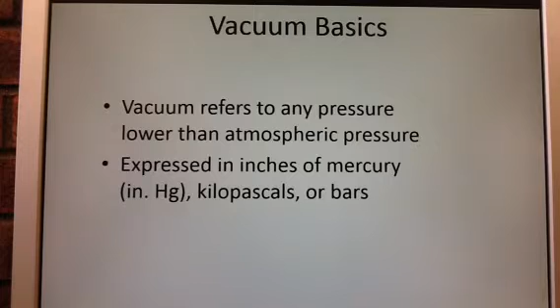We're seeing it more and more in kilopascals. And why are we seeing it more in kilopascals, guys? That's one thing to keep in mind - we're going to see that more and more versus just seeing inches of mercury.

Diagnosing and troubleshooting some of this with our vacuum. Vacuum problems can produce or contribute to the following symptoms: stalling problems, poor starting, rough idle, poor acceleration, detonation or knock, and possibly poor fuel economy.

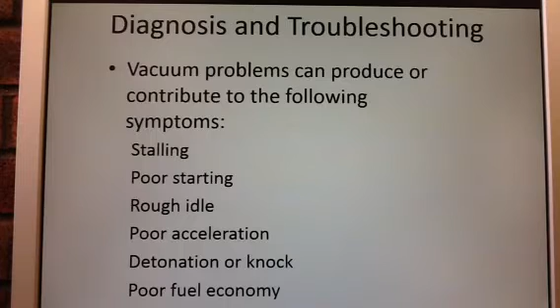Now looking at these, a lot of these could simply be attributed to maybe having a vacuum line disconnected, or a vacuum line that is cracked, kinked, or bent. We need to be able to look that over, and this is where our visual inspection comes in - seeing what's going on with this vehicle by just popping the hood and looking at it. We don't have to get too far into a diagnostic sometimes if we just visually inspect and see what's going on with that vehicle.

We need to inspect for improper routing. Maybe another technician or the customer tried to fix some problems and improperly routed some of the vacuum lines, so something might not be connected to the correct place at the correct time. You could have something like an EGR solenoid that only has vacuum at certain times - that can't be connected up to our MAP sensor, so it can't be getting vacuum at the wrong times.

Simply disconnections, cuts, or kinks - looking at something that's fallen apart. We've talked about it with our GM models, such as the vacuum line that connects directly onto the throttle body. Look at that, make sure it's connected up properly, and make sure it's not cracked or cut by any means.

And then wear near hot spots. We've also talked about this on some of our late model Ford vehicles, where we see that vacuum line on the back side of the intake manifold, or very far back there, where it's going to have a lot of heat. In that case, we need to look at those plastic vacuum lines and make sure they're not melted, and make sure there's no vacuum leaking past that.

One thing we talked about was making sure we use that smoke machine so we can see if we find any leaks - a very simple diagnostic. If we think there's any possibility of having a leak anywhere, we could use our smoke machine to try to find any of those leaks.

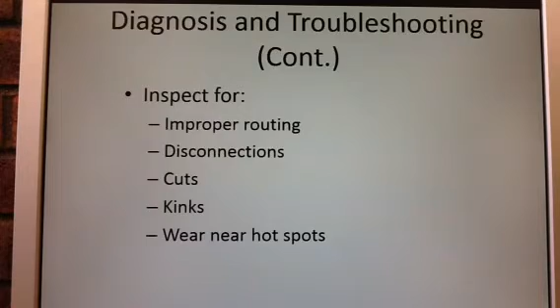Talked about turbochargers this week. A turbocharger is an exhaust-driven air pump. Exhaust gases spin that turbine blade. That turbine itself is on the hot side, the exhaust gas side. You see up here where the exhaust gas is being expelled out of the engine, it comes down into our turbine housing here and turns our turbine shaft. So we're seeing a turbine wheel, and it comes out and blows the exhaust gas back down to where it's expelled out the rest of the exhaust.

Now adversely we have our cold side over here, that's our compressor side - the compressor wheel and compressor housing, where it's directly forcing air back into the intake manifold now. So we're actually forcing air back into the intake. We have our turbine shaft connecting the two wheels together, so we spin this turbine wheel, which adversely spins the compressor wheel, therefore creating our boost pressure to blow back into that intake manifold.

So we are having that extra increase of air so we can add more fuel and have more power coming out of this engine.

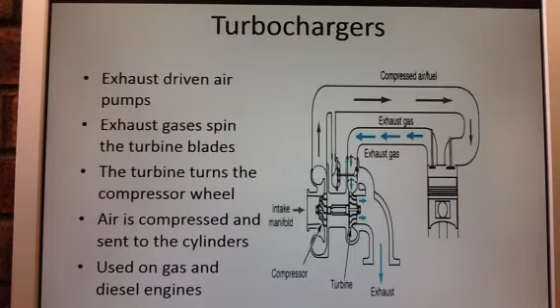The turbine, as I said, turns the compressor wheel. The air is compressed and sent to the cylinders from this. We use these on gas and diesel engines. As we talked about last week, we see this quite commonly on our diesel engines, very common to see. We are starting to see it more and more on our gasoline engines too.

Turbo lag is the lack of immediate response. It's caused by the exhaust gas requiring time to build enough energy to spin the turbo fast enough to respond to the engine speed. It's something we don't see with our superchargers, because they're driven by the belt, so they have power immediately at all times.

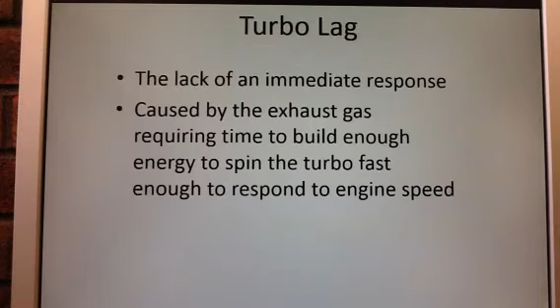However, with our turbo, we have little exhaust gas being expelled at idle or low RPM. As the RPMs increase, the turbocharger boost pressure is able to rise as the RPM of the turbocharger increases.

Our wastegate valve exists because excess boost pressure can cause drivability concerns and engine damage. We can't have too much boost pressure, so we have to be able to regulate it back down. The wastegate allows a certain amount of exhaust gas to bypass the turbine wheel once it reaches a certain level.

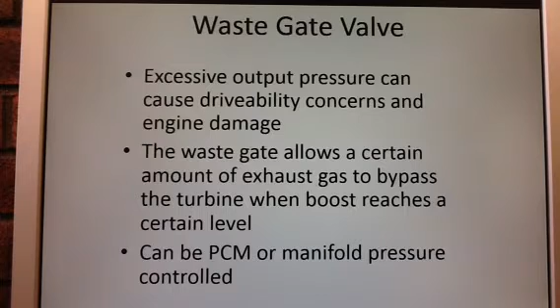That wastegate can be controlled by the PCM or by manifold pressure. It has been controlled by manifold pressure for quite some time, but we're seeing it more and more PCM controlled, so we don't have problems like a cut or kinked vacuum line, and we can regulate things better. If a vehicle needed to go into limp mode, it can simply open the wastegate up completely, and no boost pressure can be created, versus a mechanical vacuum-controlled system where we can't fully stop the turbocharger from building boost pressure. So we're seeing a lot more PCM controlled systems.

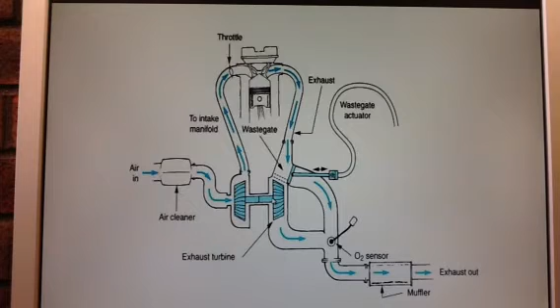As more exhaust gas comes out, the further the wastegate opens. As more pressure builds, it opens more and more, regulating the boost pressure going past this. This regulates the boost pressure so we don't have any internal damage to the engine or other problems.

Superchargers. A supercharger is a positive displacement air pump driven by the crankshaft. They improve horsepower and torque by increasing the air pressure and density to the intake, a lot like our turbocharger. Theoretically, we're once again just forcing air into the engine.

The difference is that instead of being exhaust driven, our supercharger, like this type set on top of the intake manifold, is not driven by the exhaust. We have a pulley right here, and there will be a belt on this pulley that is driven by the crankshaft.

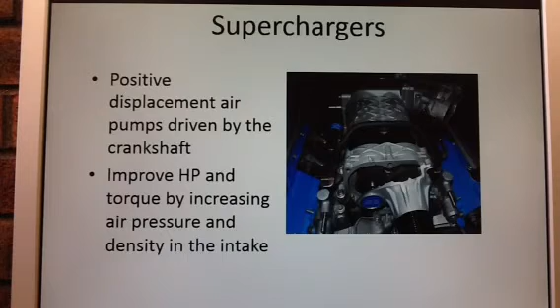It's actually driven the same as your serpentine belt that drives the alternator or maybe the water pump. That belt is going to drive the supercharger, and it's going to turn the rotors inside, creating a force that pushes air down into the intake manifold.

In supercharger operation, air enters from a remote mounted air cleaner and airflow meter. Once it passes the throttle plates, air passes through an inlet plenum.

The air is pressurized by the spinning rotors, as I talked about. This heated air then passes, generally speaking, through some sort of intercooler, so we can have that air be as dense as we can possibly get it inside the engine. We want that air dense so we don't have high heat and lose power.

If we have very high heat in the air, we're not going to get the power we need out of it. We're going to have knock, detonation, or ping. We don't want to see that type of problem.

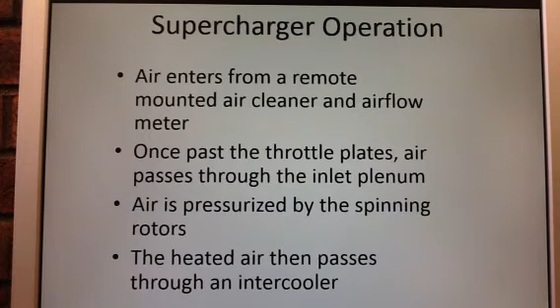So a lot of times we'll see some sort of intercooler with that. It's not as common on supercharger vehicles to see intercoolers as it is on turbocharged vehicles, but it is out there, and we're going to see more and more of them as the supercharger evolves.

There are two different types of supercharged systems we talked about: the roots type and the centrifugal type. The picture I just showed you is a roots type. It uses a pair of three-lobed rotor vanes, and the belt is driving these via the crankshaft.

So we have the rotors inside that are spinning, kind of like a vacuum, but instead of having the vacuum source sucking in, we're actually pushing out. We're sucking in from the intake side and pushing down, forcing the air into the engine.

Adversely, we have a centrifugal design. The centrifugal design looks very similar to our turbocharger, but it is belt driven rather than exhaust driven. A turbocharger is driven off of the exhaust, but our centrifugal supercharger, even though it looks a lot like a turbocharger, is driven by the belt.

We see the compressor wheel like we would see on a turbocharger, but instead of having a turbine wheel, we have a pulley. That pulley is driven by the belt off the crankshaft, and it spins the compressor wheel to build boost pressure.

So these will look very similar to a turbocharger, except now it's mounted maybe in the location where you would see an alternator or an AC compressor, where the belt is able to drive it.

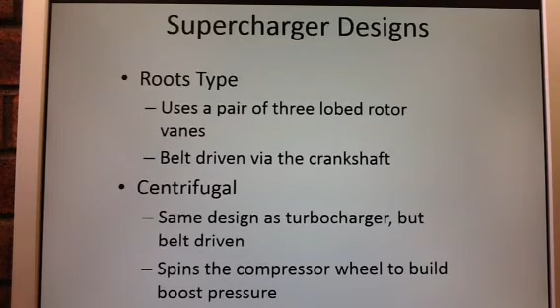So either way, with each of these designs, we're talking about a belt-driven design here, as opposed to our exhaust-driven design, which is where we're talking about our turbocharged designs.

As for maintenance for any of these pieces, normally superchargers have their own oil supply. Check and correct the oil level periodically. It's one thing a lot of people will sometimes miss.

You may do an oil change, but the oil change just isn't an oil change. We need to be looking at the entire vehicle, as we've talked about, maybe looking under the car.

Look at the tie rods, look at the steering rack, look at everything under that car. Look for oil leaks. We're not just changing oil, and it goes with this too.

If it has a supercharger, we need to look at its own oil supply. There are regular intervals that it needs to be changed. Has it been changed? We can ask the customer, or go back on our own data in our system to see if that oil has been changed.

It's something to check, just like checking our differential fluid. We check something like that if we're checking any fluid in the vehicle, period. We need to be able to check this one also, so don't forget that one.

Inspect regularly for leaks. If we notice a leak with it, we need to find out why it's leaking, where it's leaking, and fix that problem. And inspect for induction systems for leaks and filter condition.

Leaks in a turbocharged or supercharged system are going to be a lot more prone than our naturally aspirated systems. The reason behind that is we're actually forcing air now, so there might be vacuum lines that pop off. We need to be able to look on each one of those and find is there anything leaking with that.

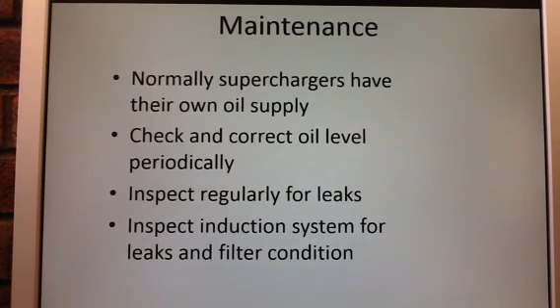So we back all the way up into looking at those cuts, kinks, bends, stuff like that. We might have a turbocharger that's building too much pressure, or a supercharger that isn't working properly. Maybe the actuator for the bypass actuator that we talked about previously this week isn't working correctly. We can look at that, and the vacuum leaks for that also. Those supercharged and turbocharged vehicles are going to be a lot more prone to having those vacuum lines come off.

Talking about our exhaust systems this week, we went all the way down from start to beginning, whether it be our exhaust manifolds, the exhaust itself, the catalytic converter, maybe the tailpipe, maybe the muffler. We talked about each one of those different pieces. We'll break that down just a little bit here.

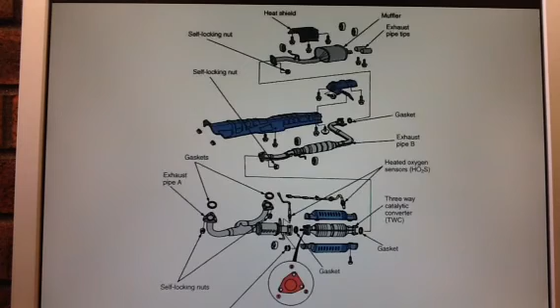The exhaust manifold collects and directs the gases, and can be cast iron or stamped steel. We usually see it in those two things. Cast iron quite commonly because it's very easy and not expensive to make, where the stamped steel gets a little more expensive because we have to have more pieces to actually build that together. We're going to see that stamped steel, or maybe stainless steel, in more exotic or newer vehicle applications.

We do not see anything aluminum at all on our exhaust manifold itself. The reason we're not seeing that this time is it's just too much heat for that to be able to put out to it. We may see an intake manifold that is aluminum, but we do not see our exhaust manifolds as aluminum.

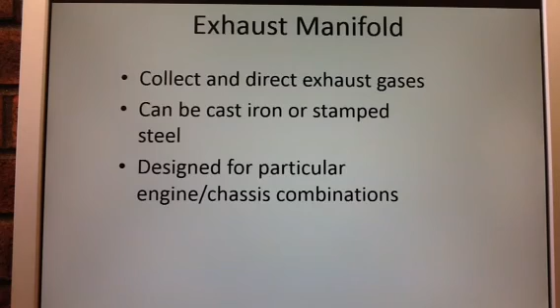They're designed for particular engine or chassis combinations. So we have an exhaust manifold that's not just made for the engine, but also the chassis combination also. We may see a Ford Crown Victoria engine that has a completely different exhaust manifold than a Ford F-150. It may be the same 5.4 or 4.6 engine, but just because it's the same engine doesn't necessarily mean it's the same exhaust manifold. So make sure when we're switching that stuff, we got the exact vehicle spec for that.

The exhaust pipe and seals run between the exhaust manifold and catalytic converters. Exhaust gaskets or seals are used to prevent leaks between components. Most gaskets and seals need to be replaced if the exhaust pipe is being replaced.

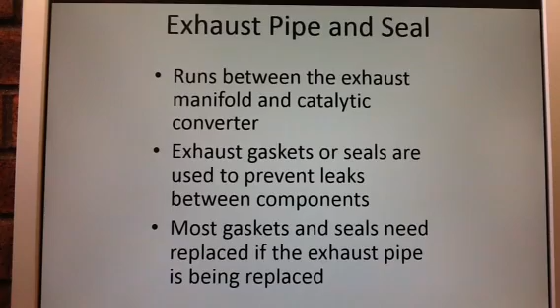When you guys start looking at these right here, make sure you aren't just using that RTV gasket maker in there. We don't need to be gunking all that on. Put the correct gasket inside of that. If it needs a gasket or a seal, put that correct piece into it. We do not want to be putting the RTV sealant against it because it's going to be able to leak and blow past out. You guys can see the exhaust pipe here.

Quite commonly in our area we see exhaust pipes such as we see right here, starting to rust up on the connections. If we're removing or doing anything with the exhaust, it's something where we might need to use a torch on the stuff to break bolts loose. We need to get that heated up, so don't forget that. It's very, very tricky not to break these bolts on exhaust.

They've been rusted and they're thinned down now, so be careful when you are actually working with this exhaust in hopes that we don't break any bolts with that, or break any of the pipe adversely also. Our catalytic converter...